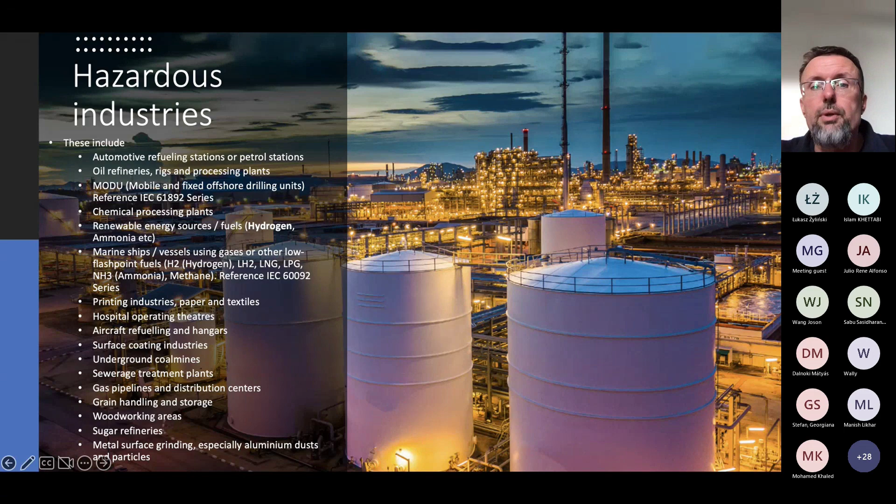Hazardous area industries are various, endless. The normal ones, we used to say, like chemical processing plants, refineries, shipyards, petrol stations. But let us not forget those which are trendy today: biogas, hydrogen, LNG, then the printing industries, hospitals, aircrafts, woodworking areas, car industries, wastewater technologies, sugar refineries. So everywhere where gas and dust hazard might be applicable, you need to count, you need to design accordingly.

That's where the basis is every time, everywhere, the explosion protection definition, which is hazardous area classification. We have IEC 60050, which gives a very interesting definition to hazardous areas: an area in which explosive atmosphere is present or can be expected in quantities such that special precautions for the construction, installation, and use of equipment are required. What it means is you need to do your design based on the data, technology, what substances we use, how much we use, what pressure we have, what temperatures, ambient, inside, and certainly what function we would like to realize and keep running for the whole lifetime of the site.

And what is also very important, whenever there is modification, this hazardous area classification has to be updated, and there is a change management technology required, because then it needs to be followed up.

Certainly, the outcome of hazardous area classification is always an EPL, an equipment protection level, which defines the possible installations to be used, to be applied for. But besides that, it will also create a definition of what procedures can be run, how we can work there, what work safety, what procedures can be realized. So it has a strong influence on everything related to explosion protection and all around.

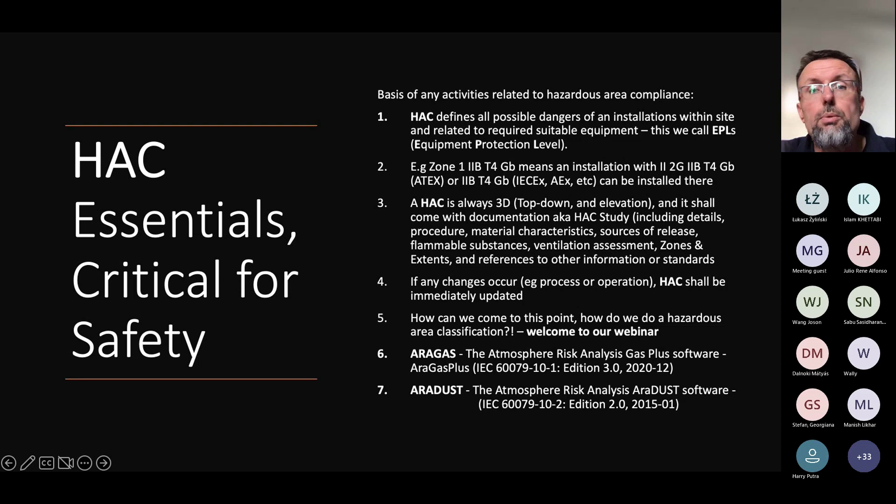So that's very important to mention, here we can deliver complete coverage for all hazardous area projects globally. What is also important to mention, and Mátyás will introduce it in a detailed way, is that the outcome of this AraGas and AraDust software is a Word document with a full set of information regarding extent, regarding calculations, and regarding possible safekeeping of the hazardous areas.

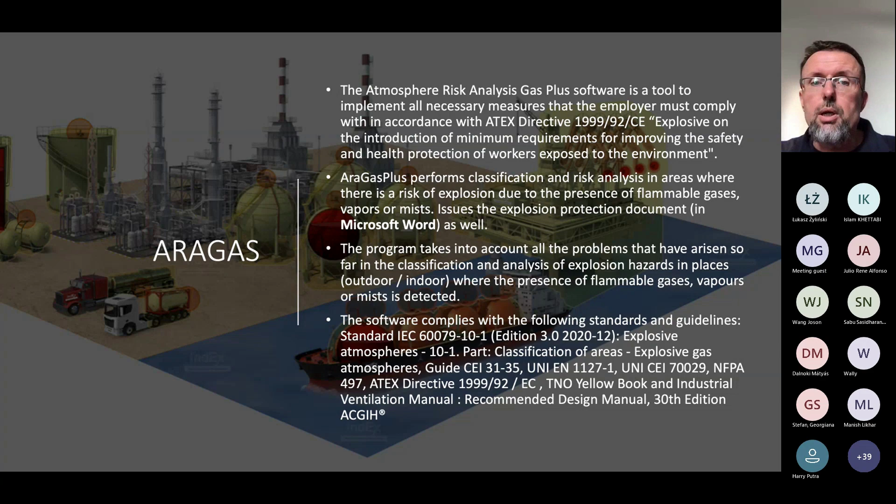So this we would like to introduce to you, and now I give the word to Mátyás.

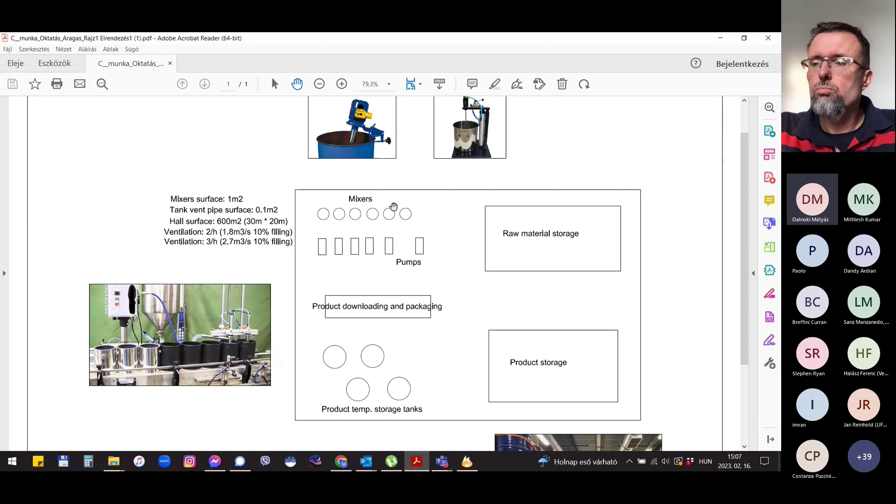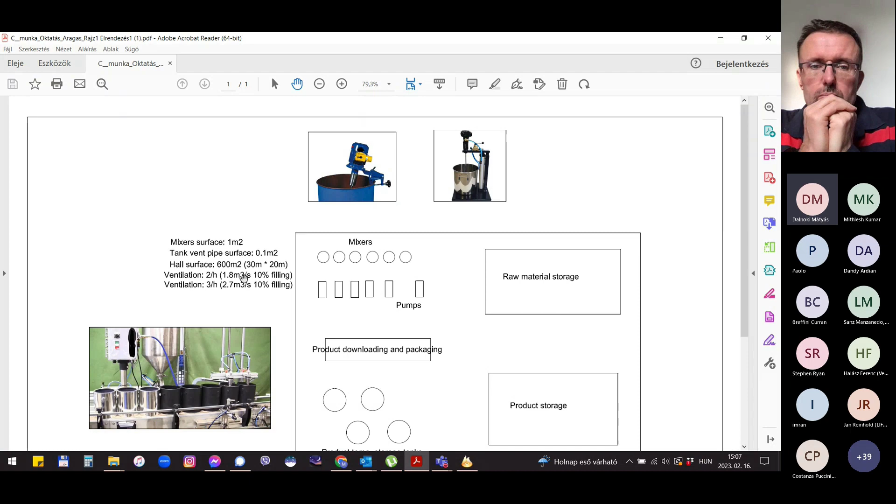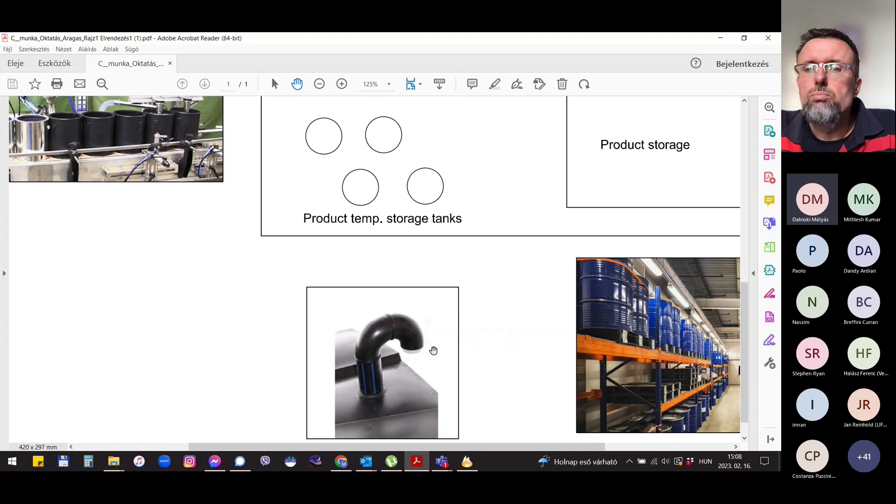We have a working hall. Just close your eyes and imagine an old empty hall with artificial ventilation. In this hall you can find some mixers which are very poorly prepared, barrels with mixers and agitators. There are some pumps and some tanks for temporary storage of the product, and these tanks have ventilation pipes located inside, vented inside into the building. These ventilation pipes don't go through the wall or through the roof into the atmosphere.

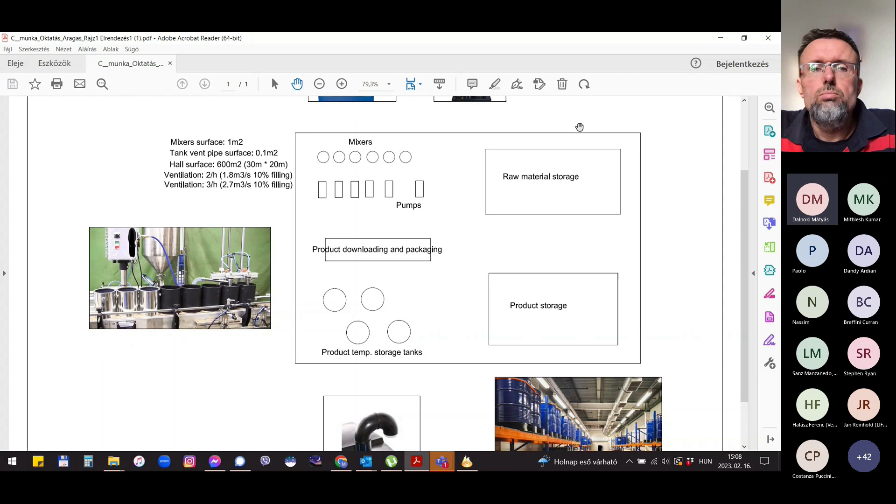So these four tanks ventilate directly into the working hall. We have a small downloading and filling line where the main painting product is downloaded and filled into cans. We have the raw material storage and the product storage area, and this whole hall has only one common artificial ventilation. There are no separation walls, no separation rooms in this hall, so everything is emitted into this hall.

This hall has a ventilation system where the inlet air goes from top to bottom, and the exhaust fans are around the bottom part of the hall. So we have an up-to-down ventilation. The ventilation rate is about 2 per hour. That's the basic situation.

Now let's see the software. What can we do with this? First, we have to prepare a new project. To create a new one, we give the main project data we'd like to record into the software: country code, address, customer, whatever, and the name of the project. The close button here is everywhere, same as the enter button in this software. Later, if you find your project and want to modify it, you can modify it, of course.

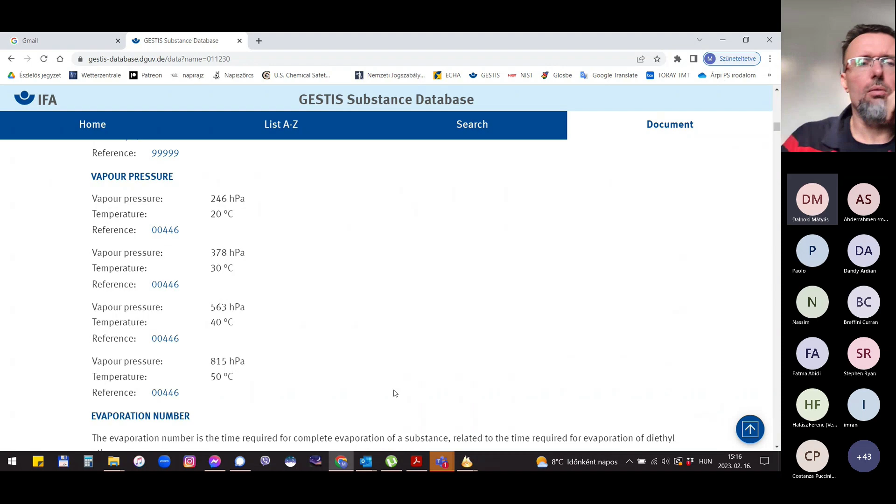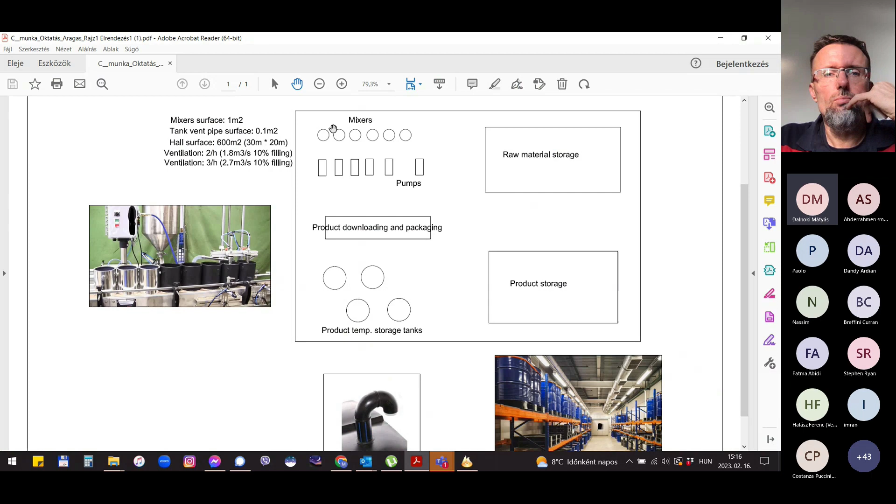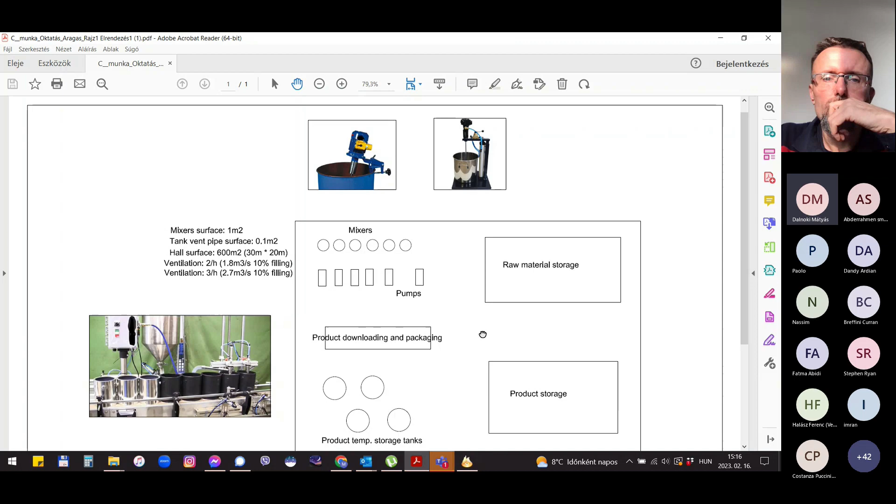So now, when we set the substance, we should say something about the source of releases. If you think back, we have got mixers, these kind of open barrel mixers, so at first we should examine the evaporation from this mixer as a whole. We have got simple pumps, simple mechanical sealed pumps, so we have got a secondary grade of release here. We don't usually see the pipes on the drawings, but we must be sure that there are a lot of junctions, pipe threads in this factory.

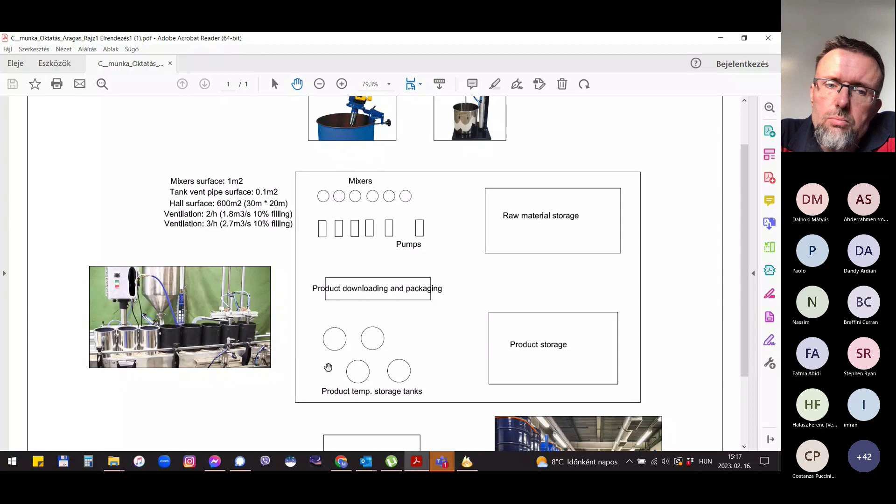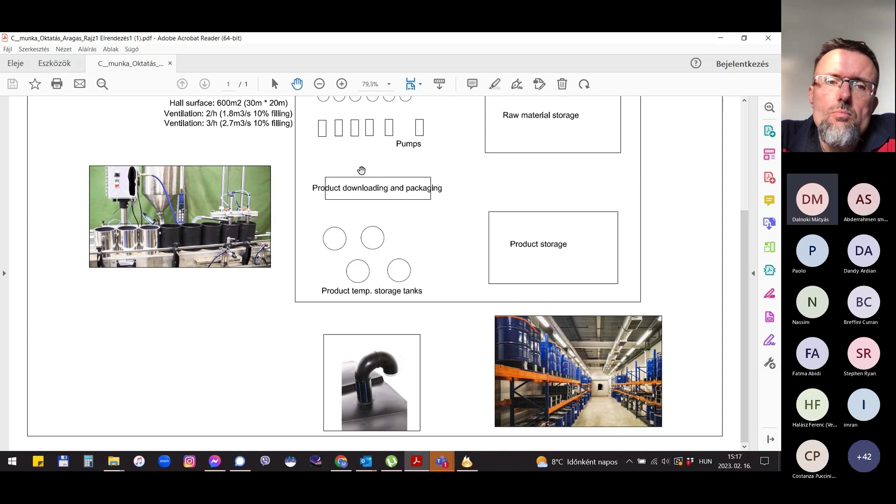And after that, we have got tanks with vent pipes, and we have got some open surfaces when we fill the cans. That's all what we have got now. So at first we should start with the mixers. I said somewhere that the surface of the mixer is 1 square meter, just to say it simply.

What is also important to mention is that if you have a number of substances, then you need to do the hazard area classification for each individually, okay? And then, certainly, based on the outcomes, you can make your final hazard area classification. That's a very important note to hear.

One more important thing - why we need the vapour pressure of the material - is because now here we can say that we have to set how much percentage will evaporate during the evaporation.

Fugitive emission we will talk about later. So now we can count the grade of the emission.

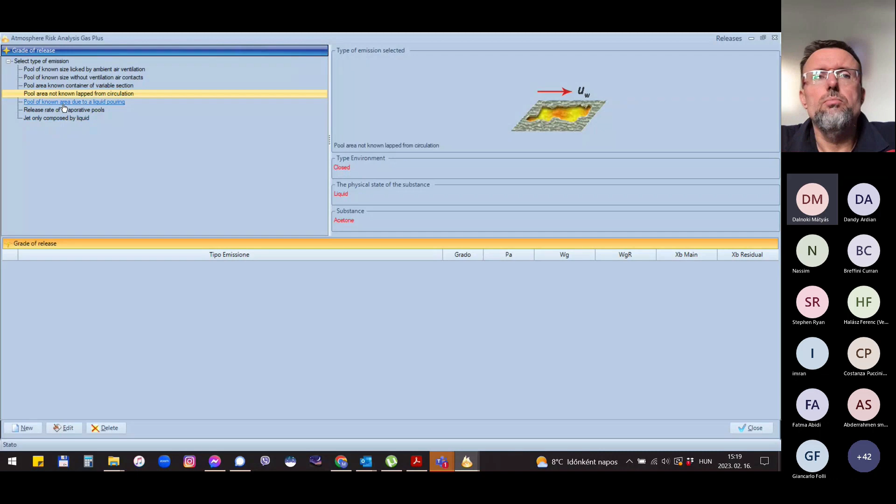In this case, we can choose different kinds of emission sources: pool evaporation when the size is known, pool evaporation when there is no direct contact with the air, different kinds of containers what we have got, when we don't know the area, the evaporating surface, we have got some other situations when we are dosing, for example, or we have got another kind of pool evaporation, and we have got jet emission. That's what we will use in case of pumps and in case of junctions.

So now we have got an open surface, a barrel which can evaporate, and there is direct ventilation from up to down. So I choose this. In this case, we should give the grade of release, because in this case there is not a continuous process, it's a batch process. So we mix the paintings, we pump it out to the temporary tank, and they don't work continuously, 4 shifts and whatever. So it's a primary grade of release, but I set it now here.

We know the evaporating surface, which is 1 square meter. We can set the temperature of the substance, the temperature of the ambient, and there is an interesting point where we could set the safety factor.

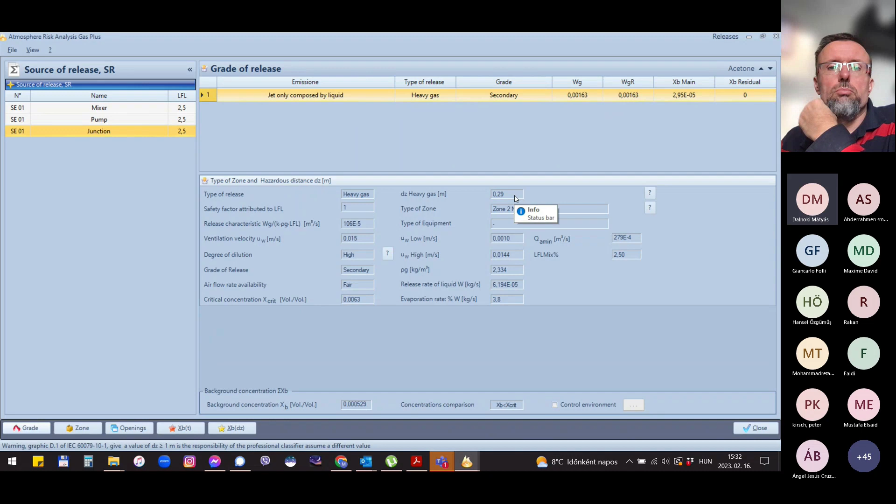Calculation, what we got: we have a small amount of negligible extent of hazardous area around the flange, but the background concentration is still rising.

We have got 2 more sources of release: the storage tank's ventilation pipe and the open cans during the downloading. So follow it with the tanks, the storage tanks. Certainly, here you need to be very consistent with the data provided to the system, because we are talking about the same area and the same unit.

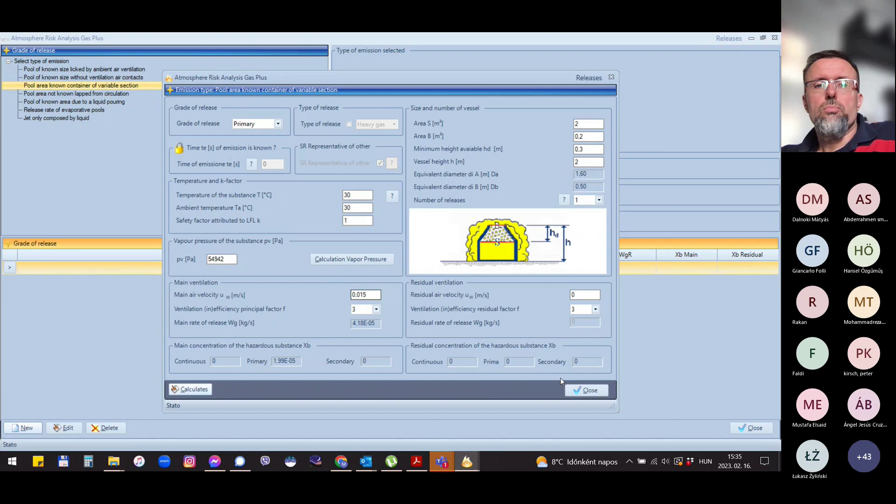Environmental data, what we need to set. How many tanks do we have? Yes, 4. Very small amount of hazardous area around the tank pipe - that's what we have got now.

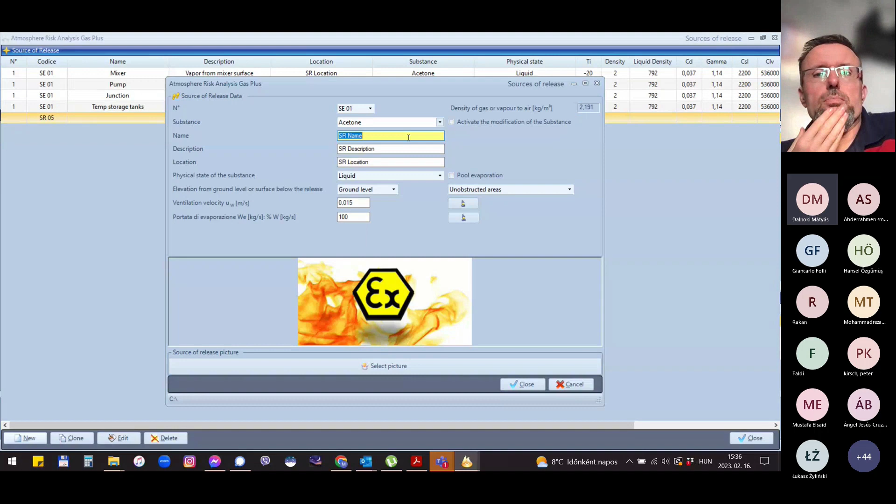And we will have one more emission source, which could be the same situation as before. Sorry, no - I missed it, I forgot to add the new emission source: can filling. You need to follow the whole procedure. That's very important.

It's enough. The number of releases, if you think it over, of course would depend on the process, but we would say it's a manual process. There are 8 in a row, and after the filling, the manual closing process has started. So at that time, I would say there are 8 cans which can be evaporating. These numbers came from the same source. Don't forget to set the safety factor to 1, and calculate. Close.

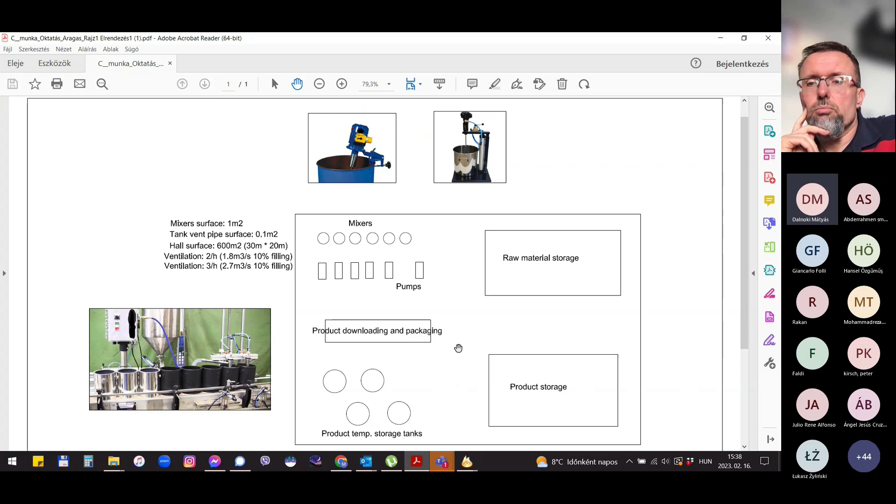So now we have almost finished because we set all the different kinds of emission sources. We can check that the background concentration is still less than the critical concentration. So these zones, what we've set and got at the end, are ready to draw as bubbles around the emission sources. What we can do now, to show our calculation as a result, is print it out in an editable form.

Here, we could say for ATEX, this software is able to manage the ignition source analysis as a risk analysis. Honestly, we don't use this part of the software in usual everyday processes.

We use this software for hazardous area classification process only, but it contains a risk analysis method with an ignition source analysis method also, and you will see at the end, when it's ready, the printout preparation process that contains the risk analysis results also, which are not set in this presentation, but can be visible at the end.

It's very important to say that based on the hazardous area classification, a risk assessment needs to be done. Certainly the software includes this functionality as well. How you do it is up to you, but it needs to be done, and the result of it will be, let's say, your overall operation. That's a very important topic.

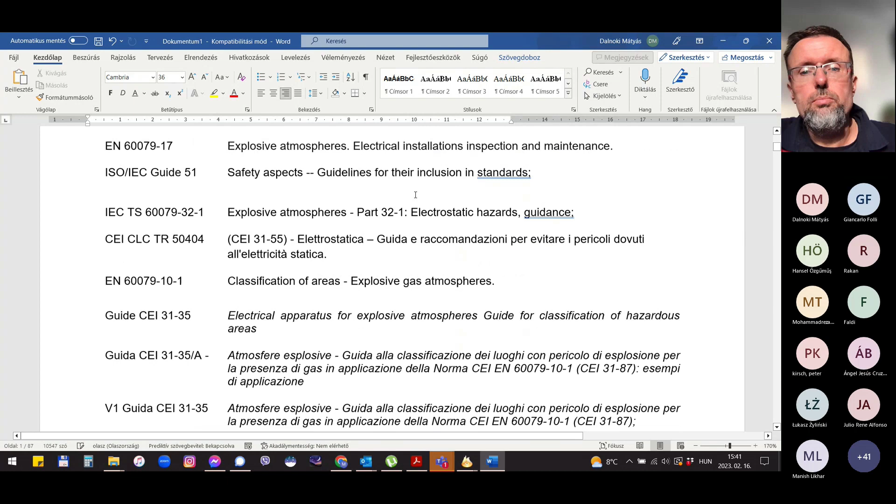So at the end, we have got a Word document which contains the standards, the basic standards that can be used during the calculation and during the hazardous area classification. There are the main definitions, zone definitions, and the basic data of the calculations.

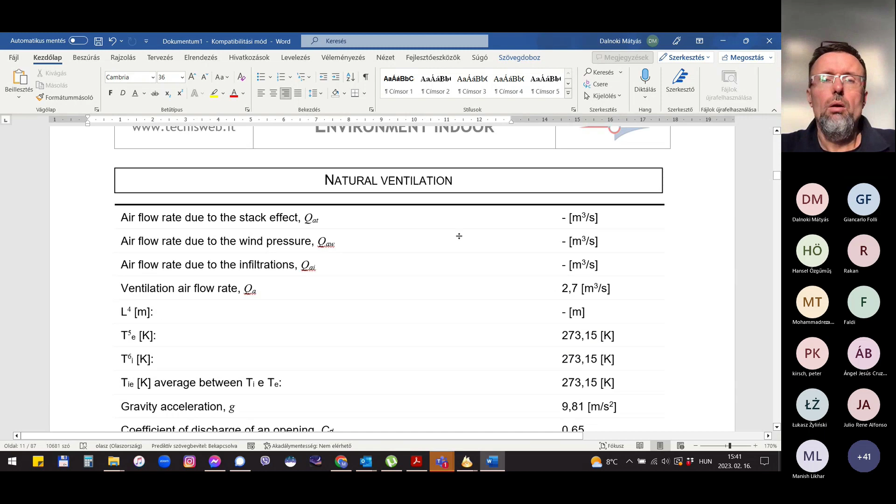Environmental data, if we would have natural ventilation, openings or whatever, it should be shown here, with the calculation also. But in our case, there is only artificial ventilation.

Next, there is a list about the hazardous materials. During the process, you can choose in the same project different materials in case of different emission sources. So in this presentation, I can use, for example, acetone for the mixers, toluene for the pumps, or add a new emission source like mixers with toluene and so on.

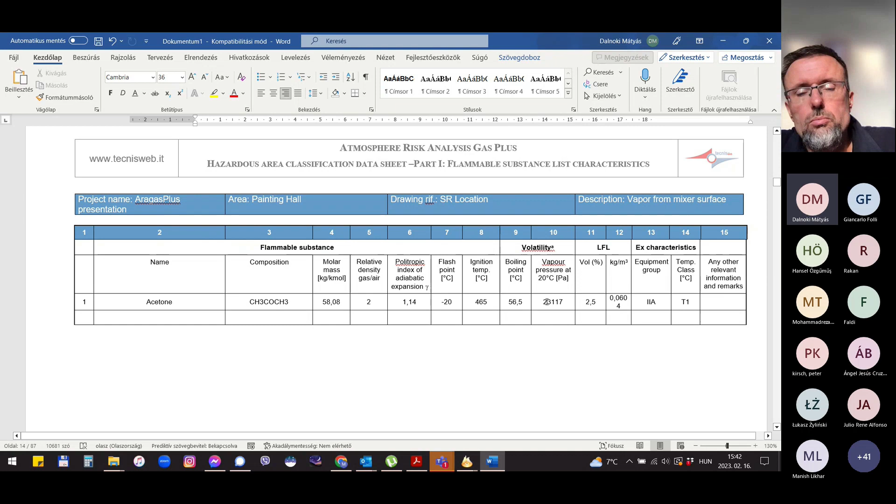And at the end in the report, there are the main standardization properties, standardized properties in the standardized form.

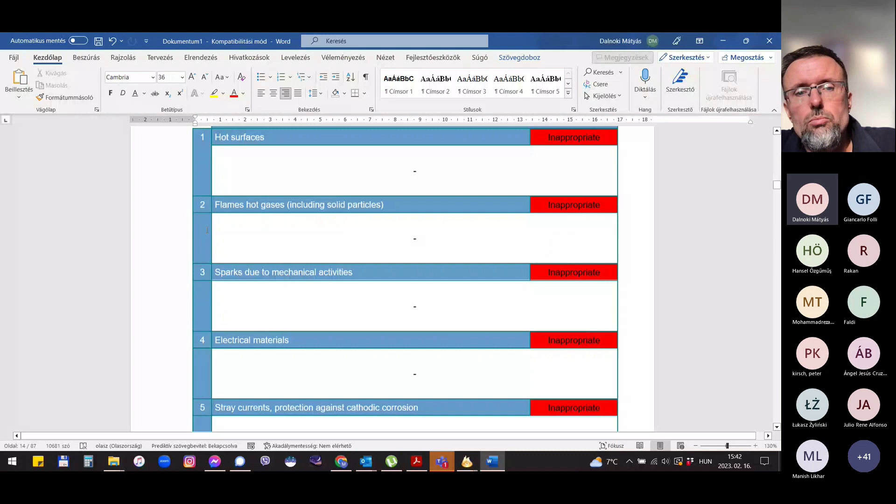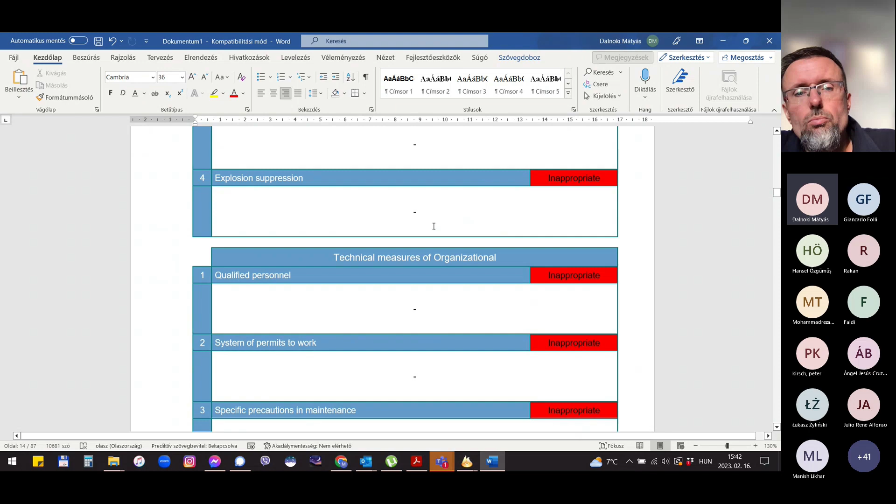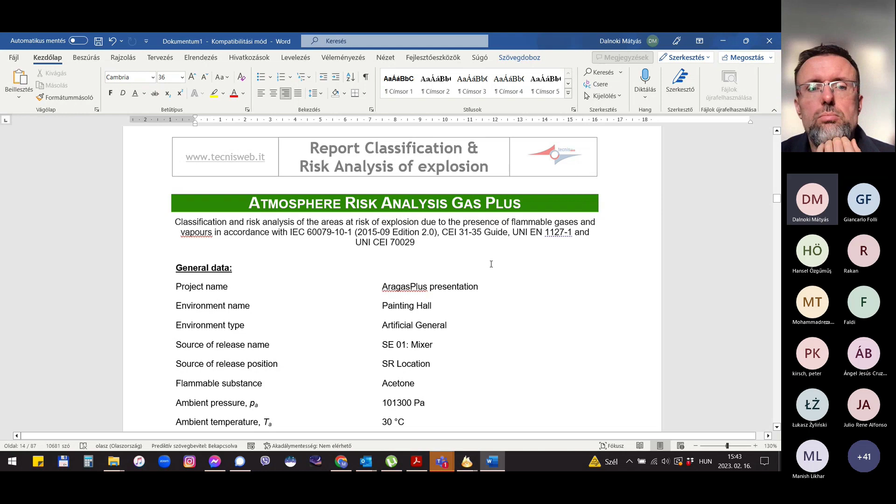This is the ignition source analysis part, which is not set yet by me because it was not in scope for today. But if we set it, the results would be here, the general data, and all the calculations we would do and have done now.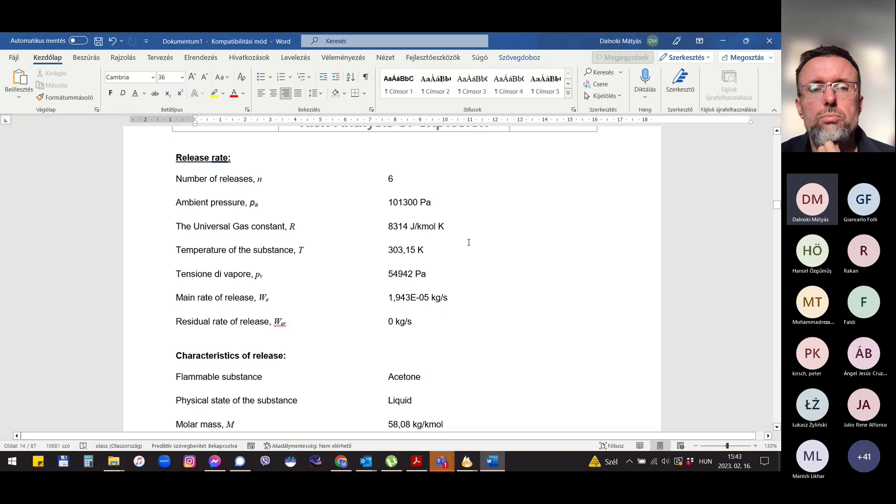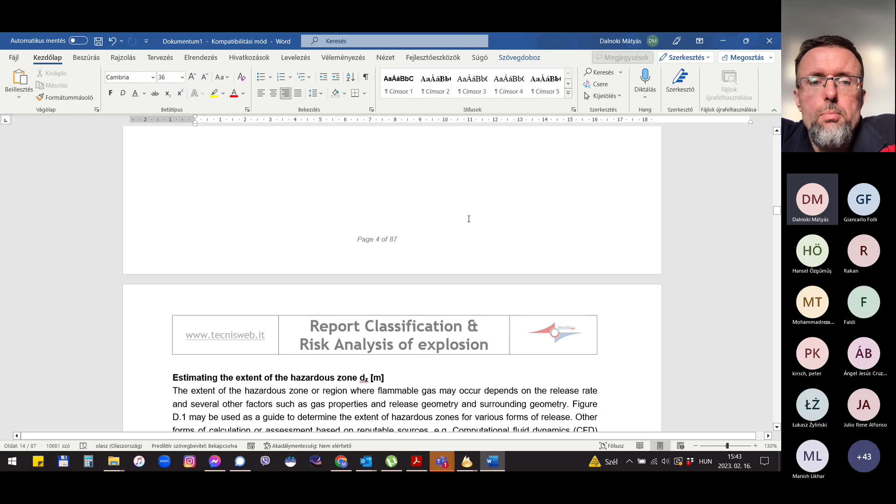So, with the quotations given from the standard, with the results, and the summarization Excels with the results of course, and with the figures we have got at the end, like this.

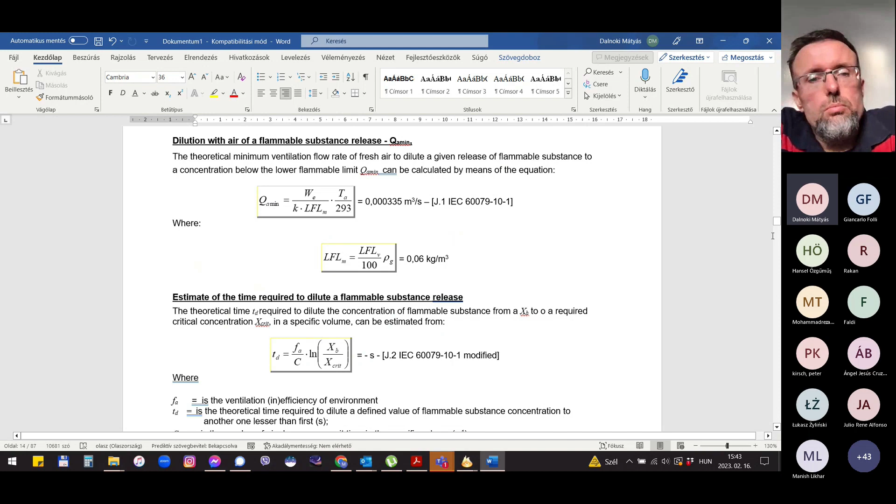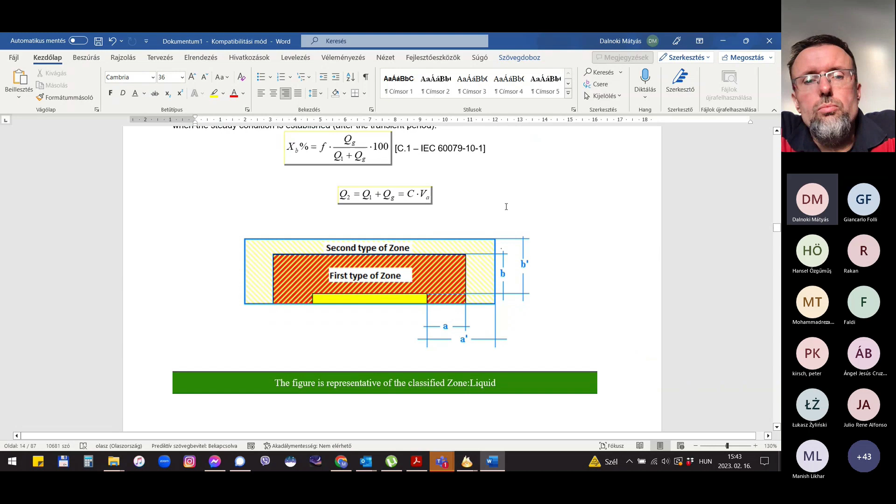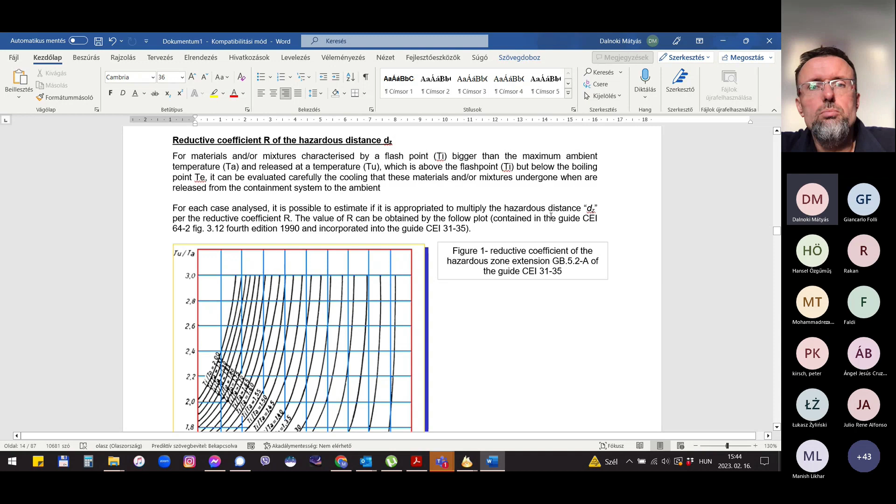And at the end we have got the dilution situation, dilution time, dilution factor, different coefficients, the type of the zone, the possibility of the reduction of the zone if you would like. But right now in the software there is not an automatically built-in thing for that, because it's only from the Italian guide which can be used. There is a possibility to reduce your zone if you use this guide at the end. It's written here. If you don't need it, you can delete it.

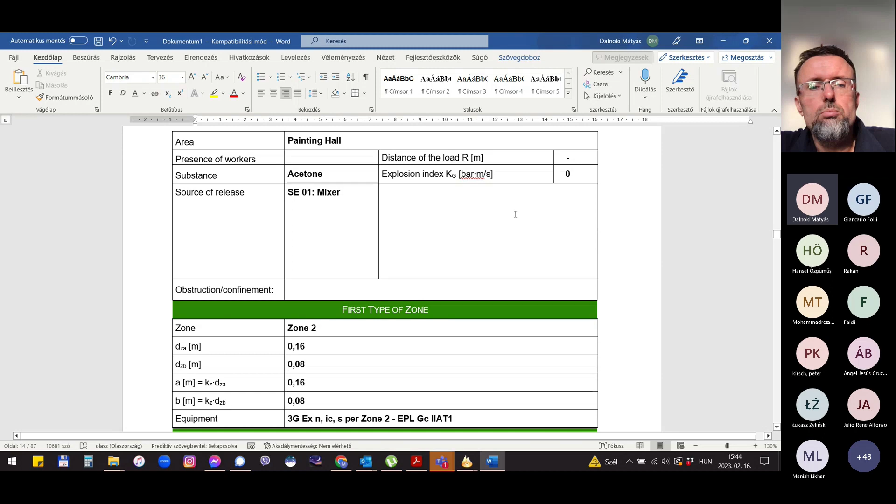And a summarization: what was the emission source, what would be the result, and the requirements, the minimum requirements for the equipment into the hazardous area. If you do a risk analysis, the summarization of the risk analysis can be shown here also.

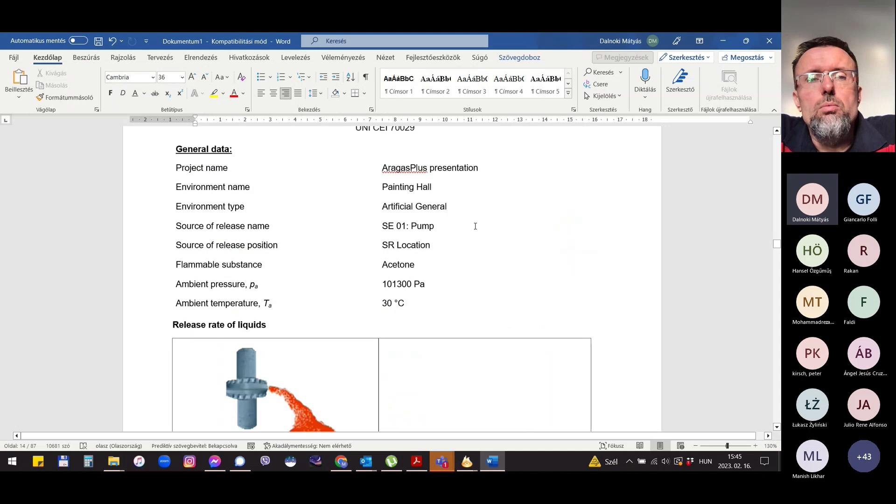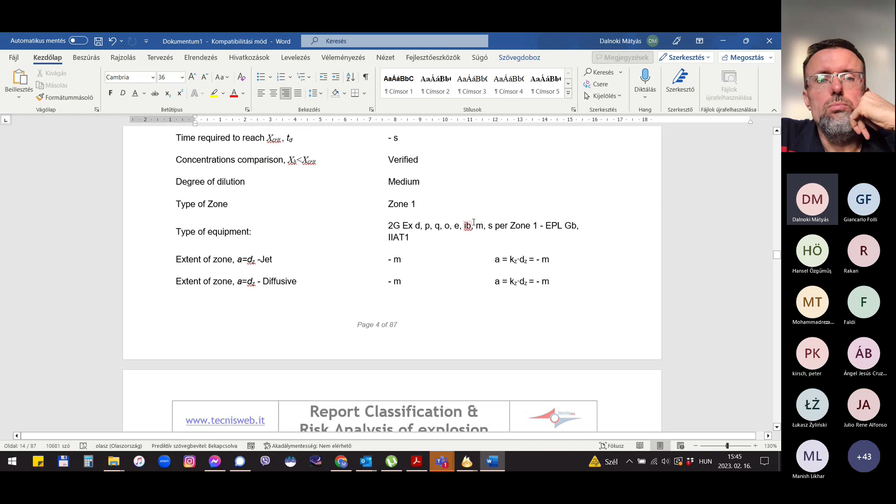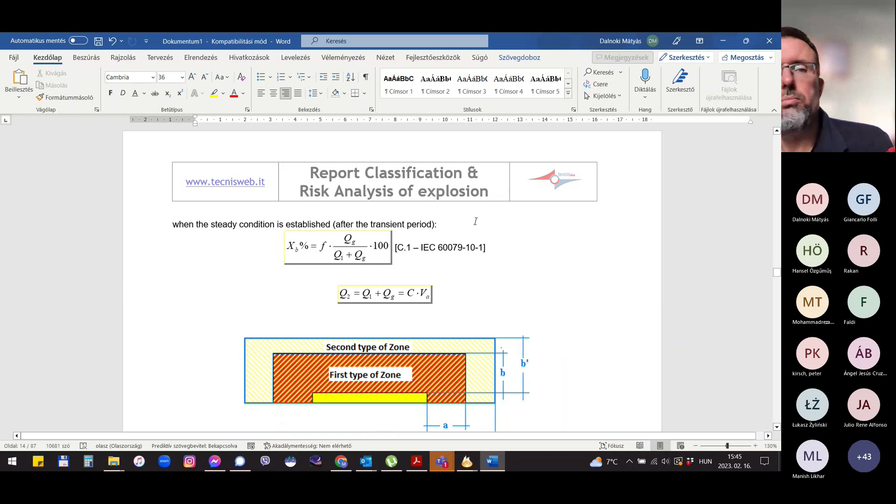Our second emission source, which was the pump, with the same methodology, equations, summarization of the results, figures, dilution calculations, additional probabilities for the reduction and the summarization, and so on, for the whole process.

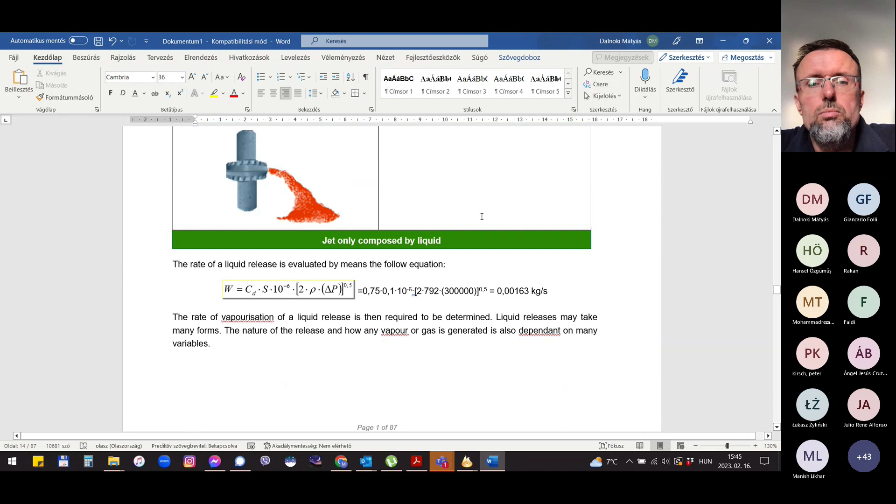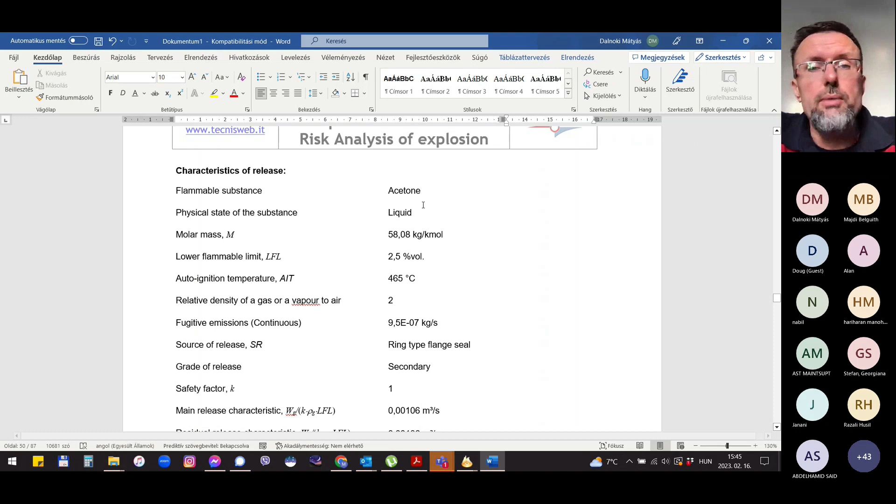Why is this important? Because for most of the cases, we receive hazardous area classifications by a drawing. From the drawing itself, you cannot be sure, you cannot say that you are on the safe side, that you have a full understanding of how the hazardous area classification has been done.

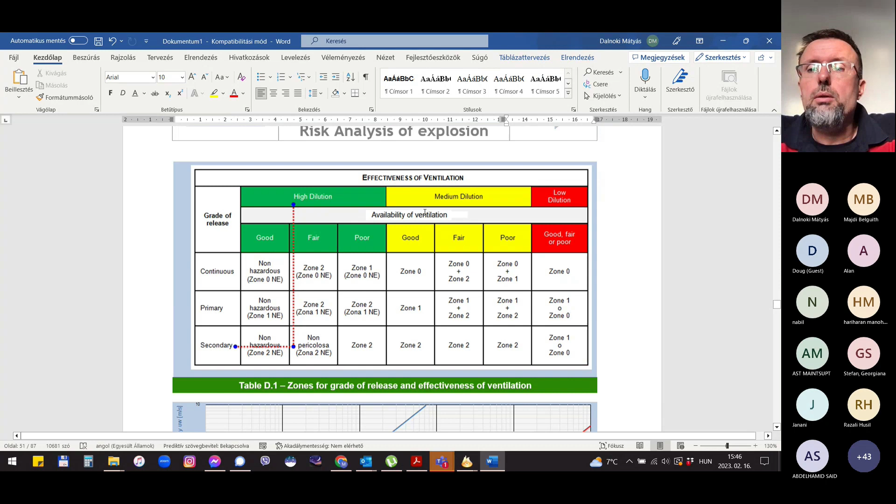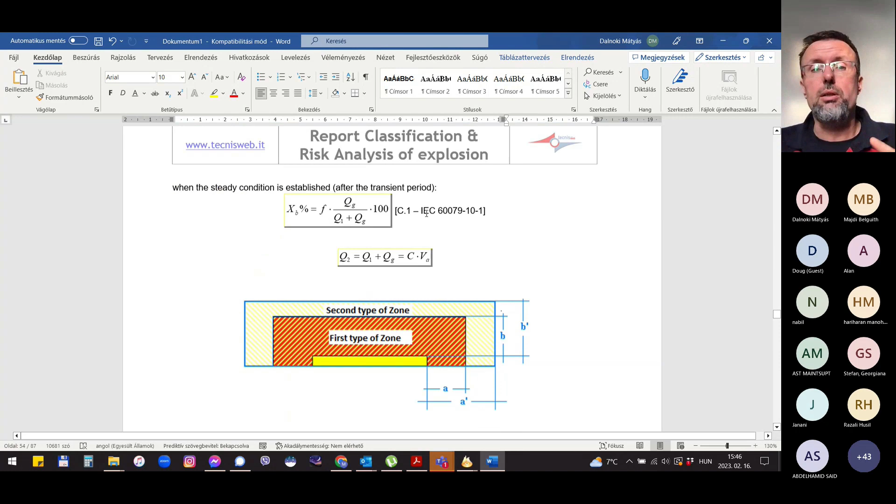So this software would give an immediate summary and overview about the whole process, how you did it according to the standard, according to your relevant standard, and a complete definition of it. Certainly this is a documentation which you might edit.

Make it more to your own, let's say, company profile, but that was our intention. That's a very important topic, and certainly you might add a few additional things, etc., but you can change it.

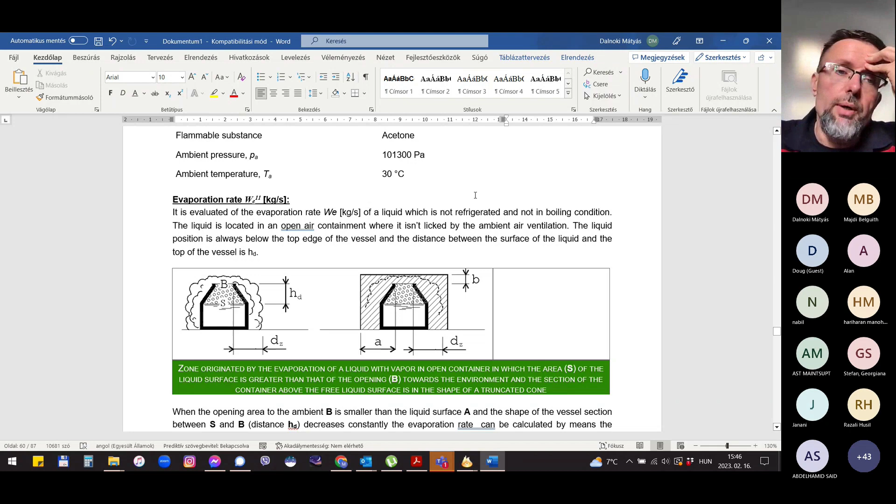Mátyás, there was a question about how the software handles hybrid mixtures. Yeah, it's a tricky thing, and that's the last thing I'd like to show you for today.

There is a tool where you can add more materials, more substances to the database you are using. Here you can add new ones, and if you have physical properties data about your hybrid mixture, you can add it here. That's a very unique feature, that you can come up with mixtures, but you need to have a very precise database, which is a crucial point.

In our practice, there was no case where the customer had data about the mixture that we should analyze for the hazardous area classification. In most cases, there was no possibility to send it to a lab to measure it. So in case of mixtures, we have to repeat the calculations.

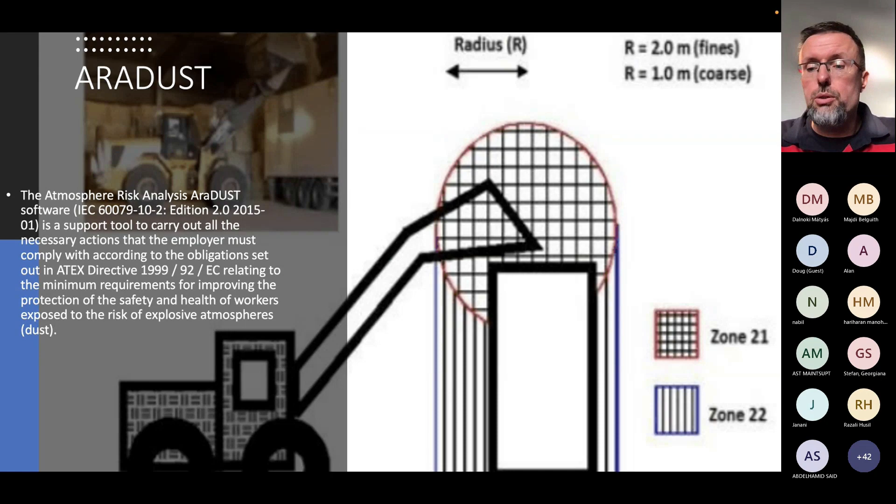And if we talk about AraDUST, here is a short overview. We are planning to have a similar session with AraDUST in a few weeks' time. If you're interested, we invite you again — we hope to welcome you. That's also a very unique feature, a very unique software where we can deal with dust hazards and dust technologies, which are completely different from gases in terms of behavior.

Here in the follow-up, we summarized a few questions and answers from our side — what can be done with Aragas and how it works. Important to say that Aragas is a PC-based software, not cloud-based, not running via the internet. We don't store your data — it runs on your PC in your protected environment. There is a purchasing fee, which we will update you on.

We'll send it to you in an email chain. And there's an annual fee for updates, which we do continuously, depending on standardization updates, good engineering practice, etc. This software is applicable for engineering companies, but also for end users, EPC companies, inspectors, and authorities to check and recheck various future and existing hazardous area classifications.

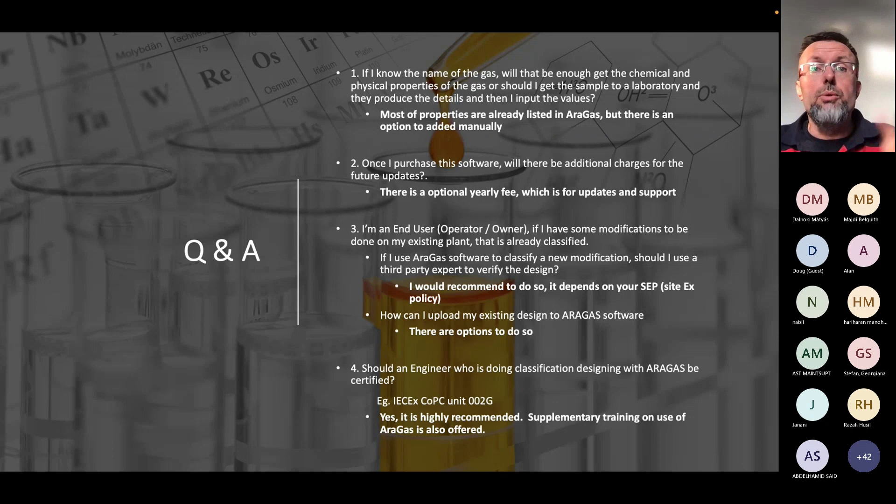As you might have experienced, to use a software like this, you need some understanding of explosion protection and the different definitions given by the standard. So we highly recommend proceeding with something like the IECEx CoPC unit 002G module, which covers hazardous area classification in general and would give you the credit to use it properly.

On the other side, Aragas is able to reproduce existing hazardous area classifications, but again, hazardous area classification is not just a drawing. It is a complete set of documentation, including technology, substances, pressures, various values, and the technology itself — what we do with that substance. If there's any limitation — yes, Aragas is limited to one computer, one PC.

Certainly it can be reinstalled, which is a kind of easy process, but then on the previous one, it doesn't work, okay? So that's an important topic. The presentation itself you will receive as well.

Aragas, as a software tool, doesn't create the classification drawings, okay? So depending on what type of drawing you use, AutoCAD, ECAD, whatever, or by hand, you need to do it on your own, which I do believe gives you a certain flexibility if you like that.

This Aragas can be used for various purposes, even to conduct a gap assessment at the feed stage, or go for a HAZOP, okay? Or, like Mátyás said, very detailed, it can be used for a risk assessment, ignition source assessment, or even under the ATEX environment, under the ATEX regulation, an EPD can be created with it. To be honest, EPD is a very useful thing because it gives you a description of how to handle explosive areas for the long term.

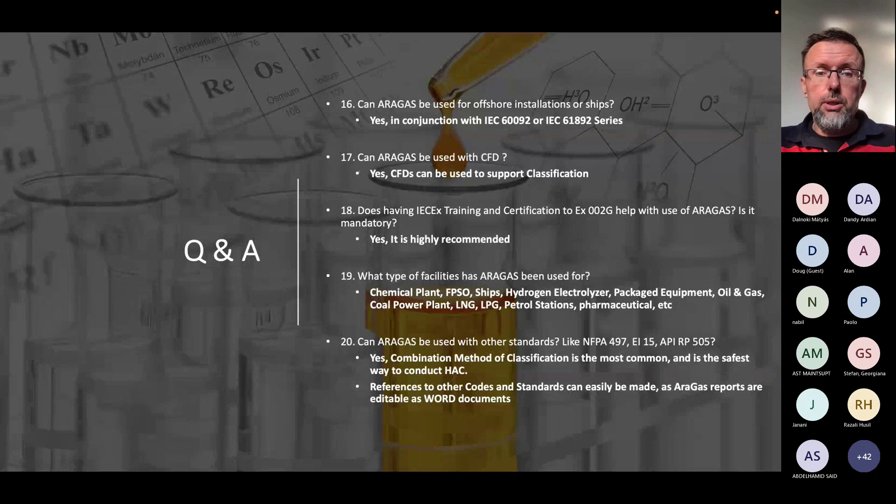And certainly NFPA, EI or API - these are all applicable standards which we use for various projects, including with Aragas. Okay, so that's also a possibility.